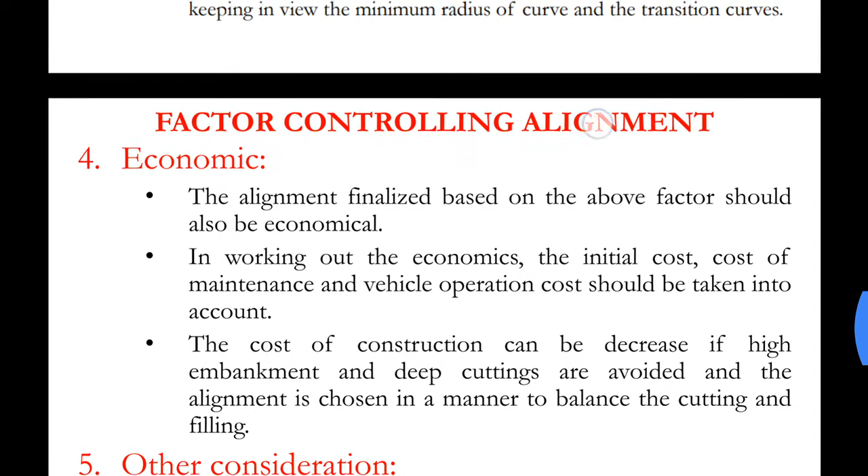In my previous lecture, we had discussed the factors controlling alignment. Now let us go to the next topic: engineering surveys for highway locations. So, what are the engineering surveys that are conducted before or for locating the highway locations? Before a highway alignment is finalized in a highway project, the engineering surveys are to be carried out.

The surveys may be completed in 4 stages. The first 3 stages consider all possible alternate alignments, keeping in view the various requirements of highway alignment. The fourth stage is meant for the detailed survey of the selected alignment.

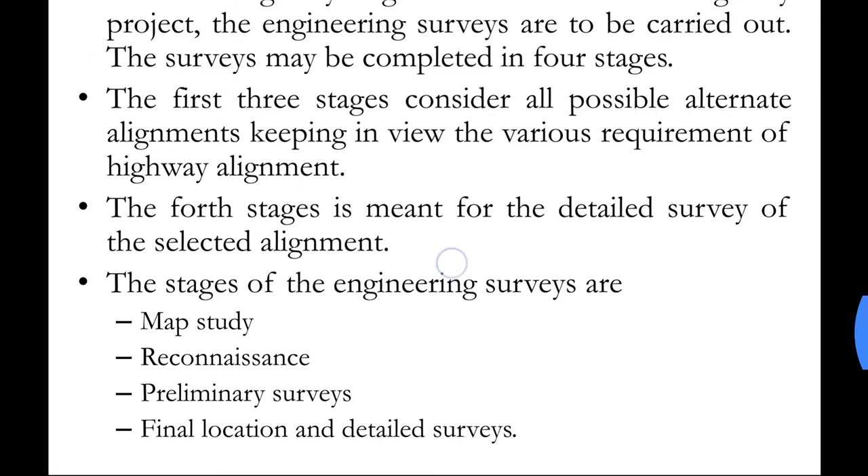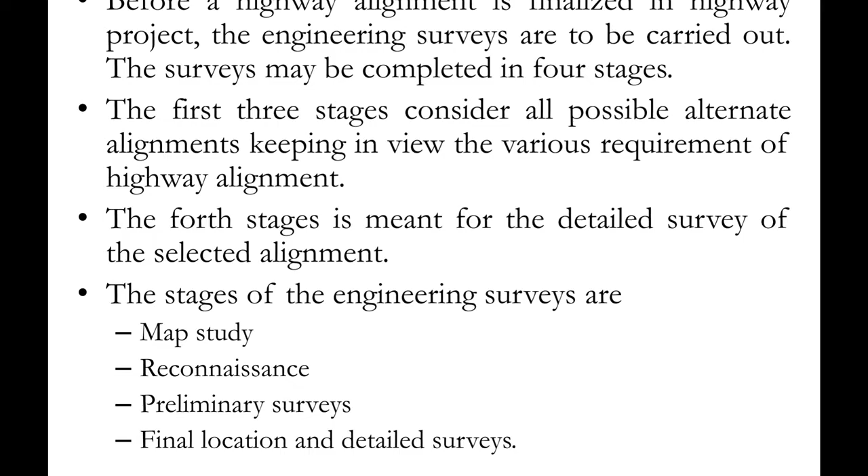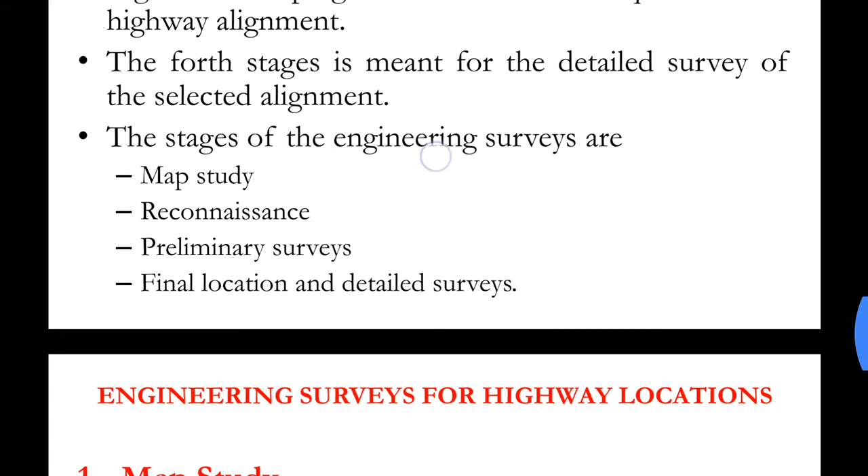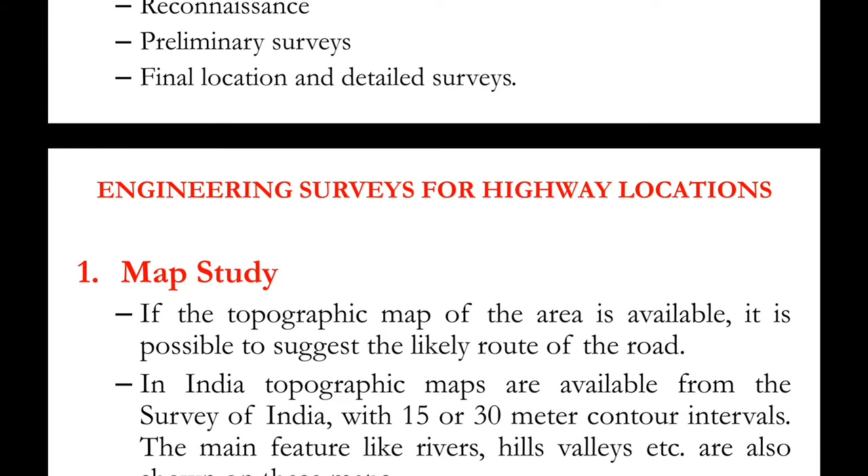So in the first 3 stages of our engineering surveys, we consider different alignment alternatives. At the end of the third stage, we fix a single alignment which would be the best one, and in the fourth stage we consider that alignment and do the detailed survey. So, the stages of the engineering surveys are as follows: first, map study, then reconnaissance, preliminary surveys, and final location and detailed surveys. There are four stages to be conducted.

The first stage is map study. If the topographic map of the area is available, it is possible to suggest the likely route of the road. If we have those topographic maps of that particular area available with us, then we can initially generate a few alternative routes. We can try to avoid the obstructions, and based on that we can generate various alternatives, trying to keep the shortest alignment.

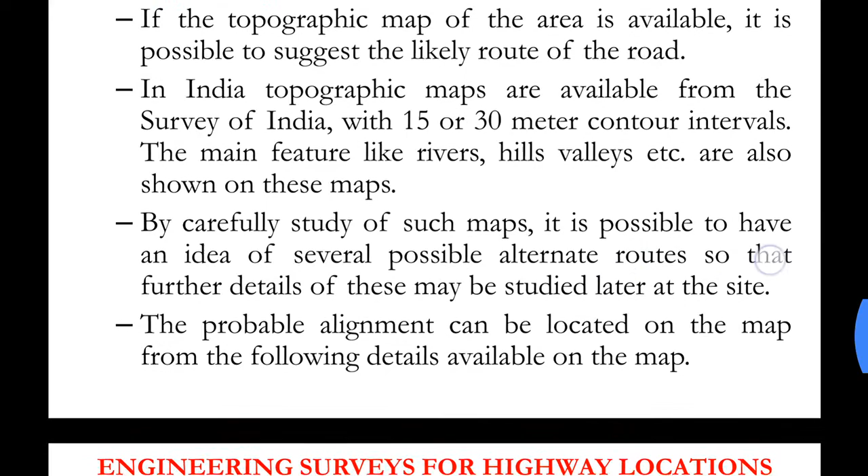In India, topographic maps are available from the Survey of India department with 15 or 30 meters of contour intervals. The main features like rivers, hills, valleys, etc. are also shown on these maps, and these will help us to align the roads. By careful study of such maps, it is possible to have an idea of several possible alternate routes, so that the further details of these may be studied later at the site.

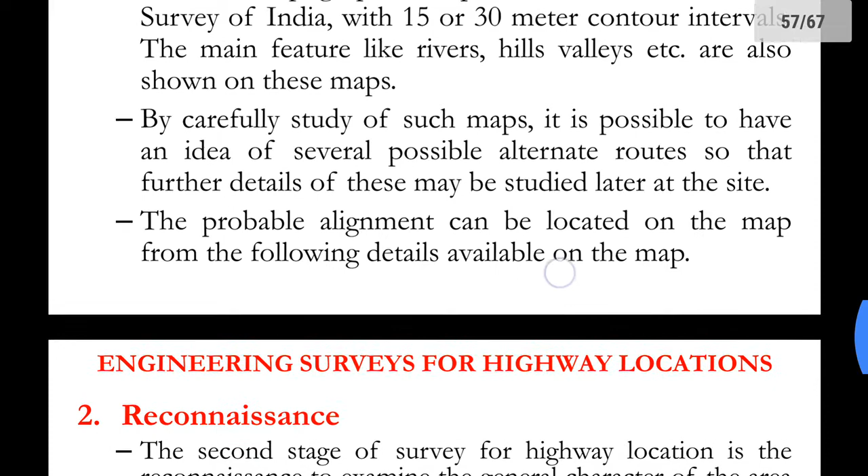The probable alignment can be located on the map from the following details available on the map. So from the details which are available on the map, we can generate various alternatives of our alignment.

The second stage is reconnaissance. The second stage of survey for highway location is the reconnaissance, to examine the general character of the area for deciding the most feasible routes for detailed survey.

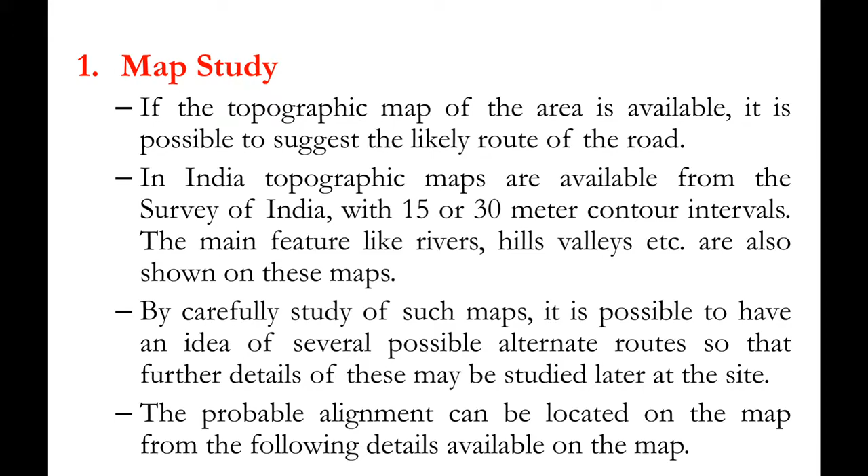In the reconnaissance survey, what we do is we actually go on the field. Up till now, during the map study, we didn't go to that area, but rather we just had a look at the map, and based on the map we tried to generate a few alternatives. Now what we do is we go on the field.

A field survey party may inspect the stretch of land along the proposed alternative routes of the map in the field. Very simple instruments like Abney level, tangent clinometers, barometer, etc. are used to collect additional details.

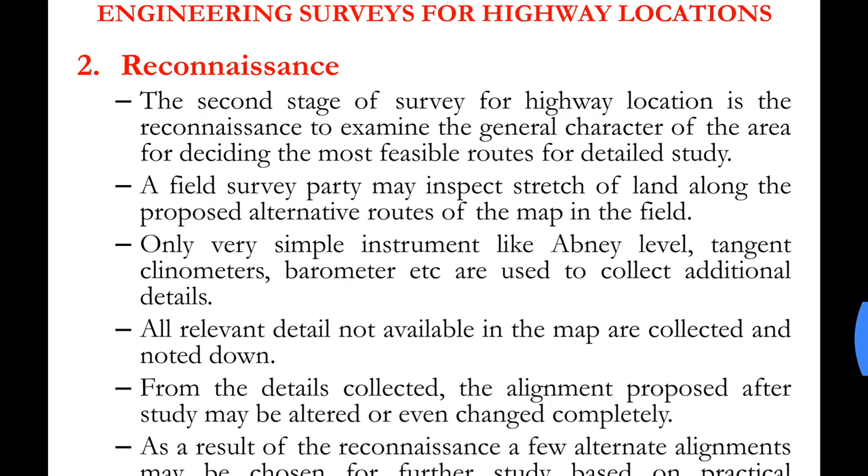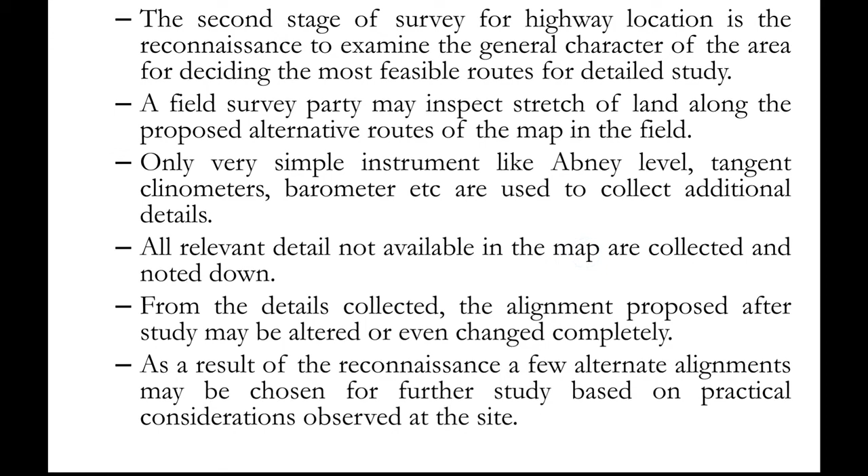All relevant details not available in the map are now collected and noted down. There may be a few details which are not shown in the map, so these details we will collect during the reconnaissance stage.

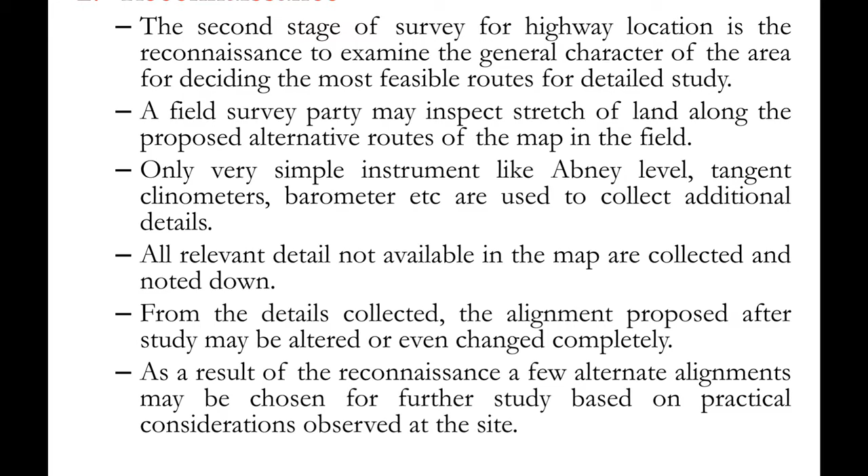From the details collected, the alignment proposed after study may be altered or even changed completely. Now based on these details, we can again alter the alternative alignments that we had set up in the first stage. As a result of the reconnaissance, a few alternate alignments may be chosen for further study based on practical considerations which are observed at site.

So now comes the third stage, which is the preliminary survey. The main objectives of the preliminary survey are to survey the various alternate alignments proposed after the reconnaissance and to collect all necessary physical information.

So we need to survey details with respect to all the different alternate alignments that we had considered, to compare the different proposals in view of the requirements of a good alignment, to estimate quantity of earthwork materials and other construction aspects, to work out the cost of alternate proposals, and to finalize the best alignment from all these considerations.

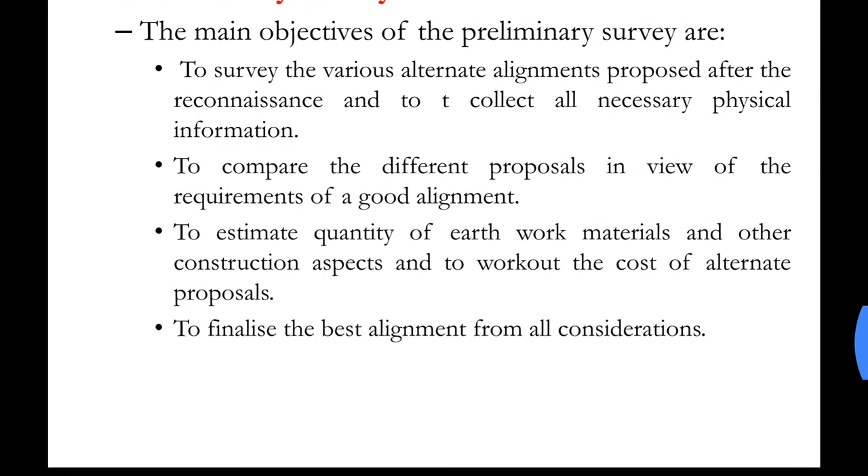So these are the steps we need to do in the preliminary survey. We need to consider all the different alignments, consider different proposals for each of these alignments, and try to find out the cost of each alignment, and whichever would be the best or most economical, we will consider that alignment.

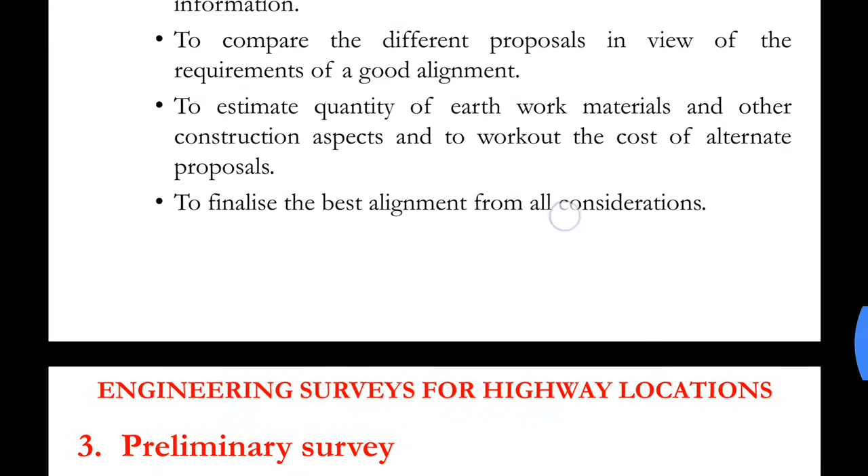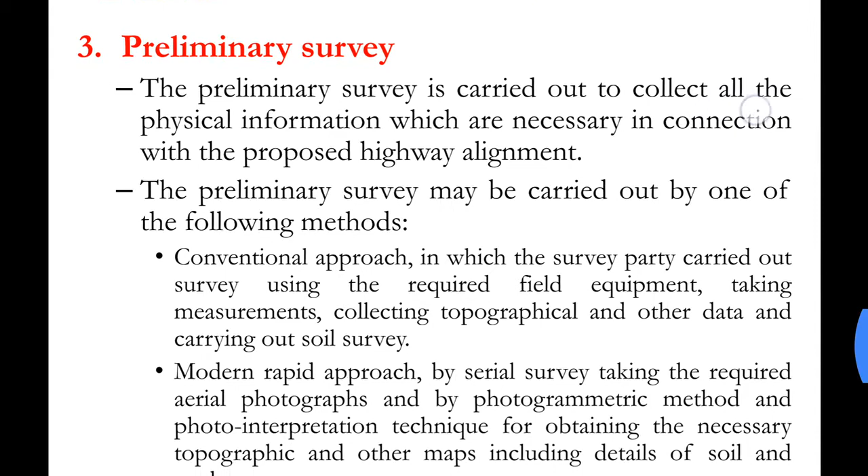Okay, so what actually happens in preliminary survey? The preliminary survey is carried out to collect all the physical information necessary in connection with the proposed highway alignment. The preliminary survey may be carried out by one of the following methods: either a conventional approach or a modern rapid approach.

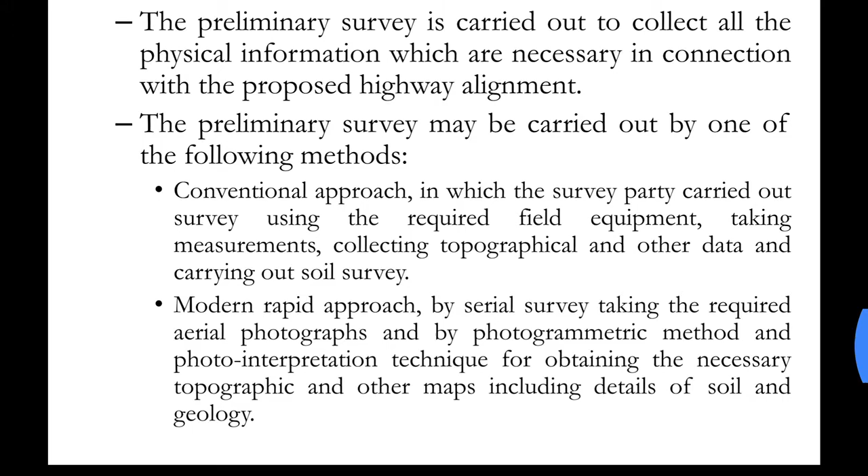In the conventional approach, the survey party carries out survey using the required field equipment, taking measurements, collecting topographical and other data, and carrying out soil survey. So if we actually go on the field and conduct surveys, that would be the conventional approach. What is the modern or rapid approach?

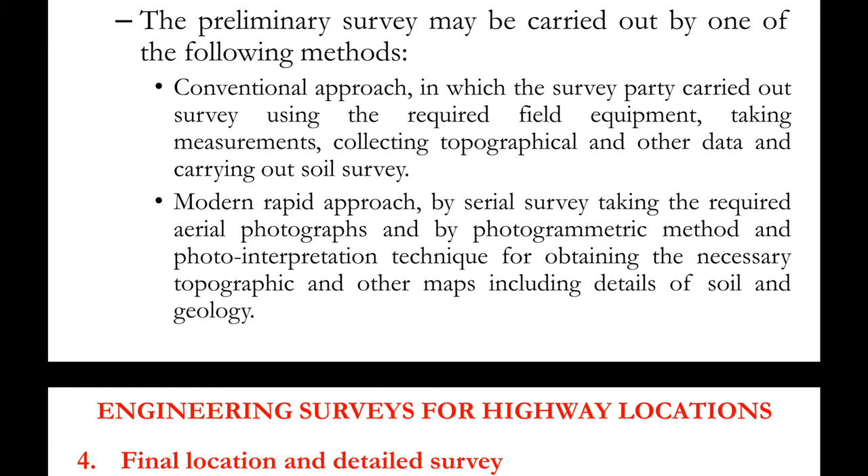By aerial survey, taking the required aerial photographs, and by photogrammetric method and photo interpretation technique for obtaining the necessary topographic and other maps, including details of soil and geology. So if we use aerial photographic techniques, photogrammetric method, or photo interpretation techniques, this would be the modern approach. In this case, an actual survey party may not be required to go on the field.

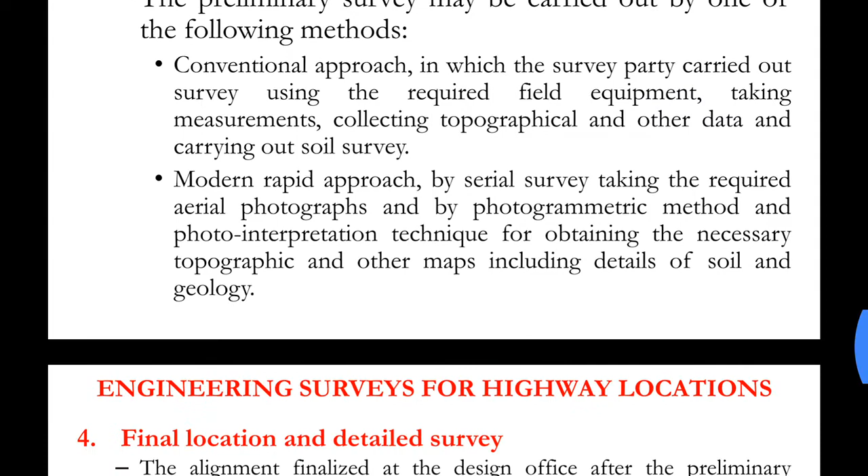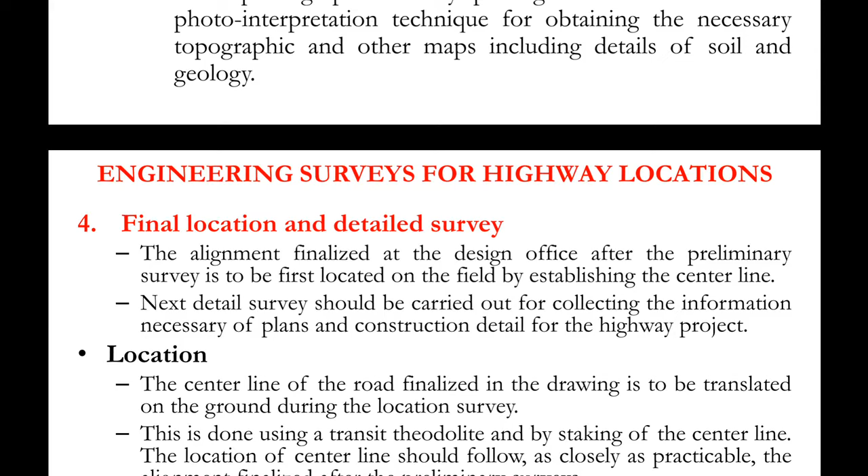So after the preliminary survey stage, a final alignment is already decided. Now what we need to do is a detailed survey on that particular alignment. So the fourth stage is the final location and detailed survey. The alignment finalized at the design office after the preliminary survey is first located on the field by establishing the center line. So the alignment is transferred to the field, and a center line is drawn.

Next, detailed survey should be carried out for collecting the information necessary for plans and construction details of the highway project. Detailed survey may be conducted to find out all the details required for construction of the highway.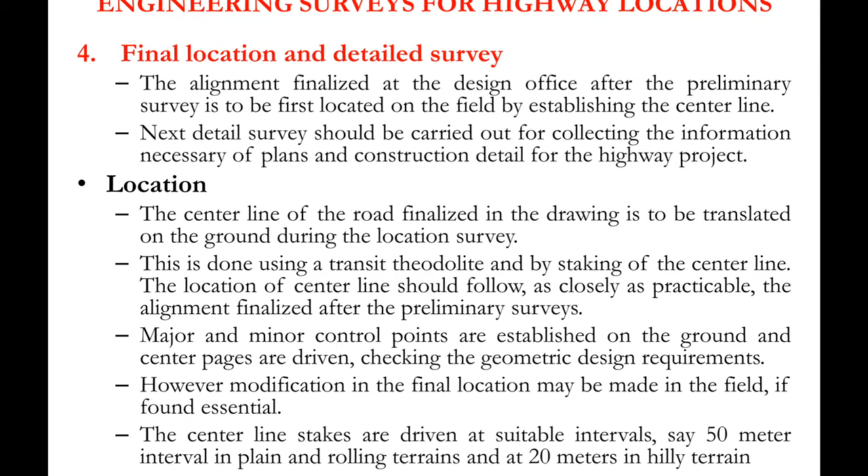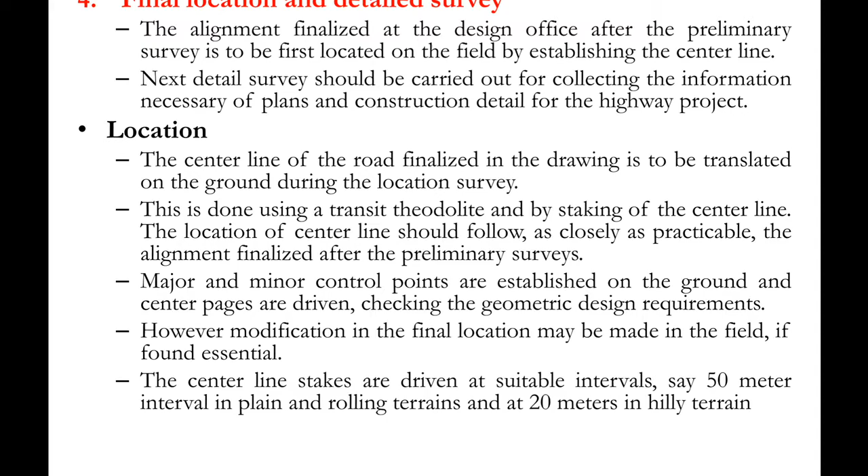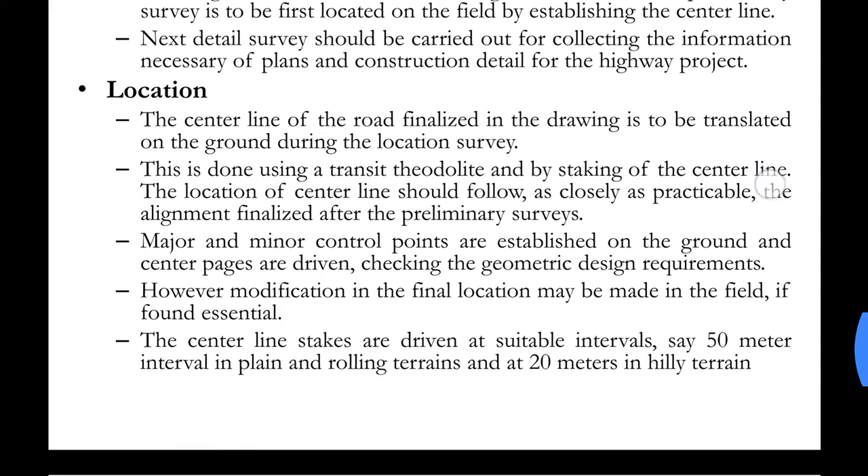In this, first is location. The center line of the road finalized in the drawing is to be translated on the ground during the location survey. This is done using a transit theodolite and by staking of the center line. Using a transit theodolite, we stake out the center line of the highway.

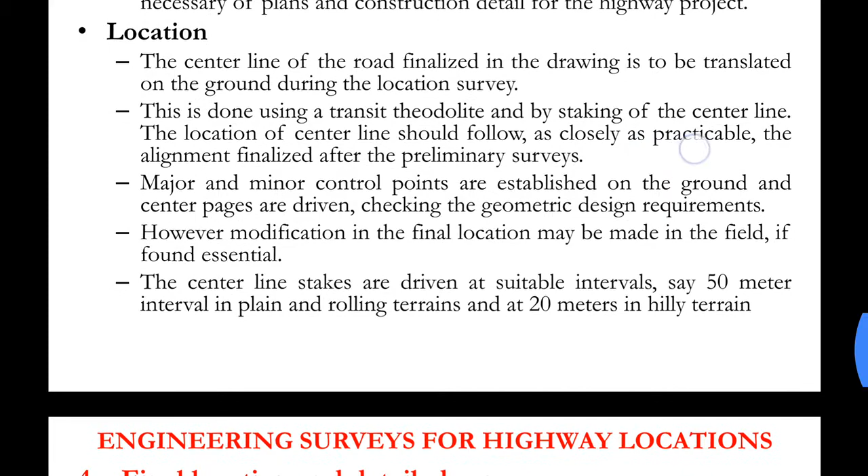The location of the center line should follow as closely as practicable the alignment finalized after the preliminary surveys. Major and minor control points are established on the ground and the center pegs are driven, checking the geometric design requirements. These major and minor control points may be at any change in direction or change in gradient.

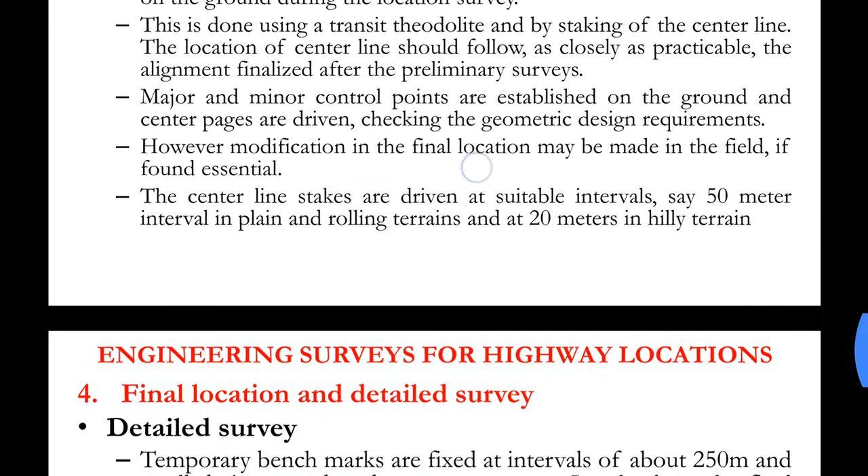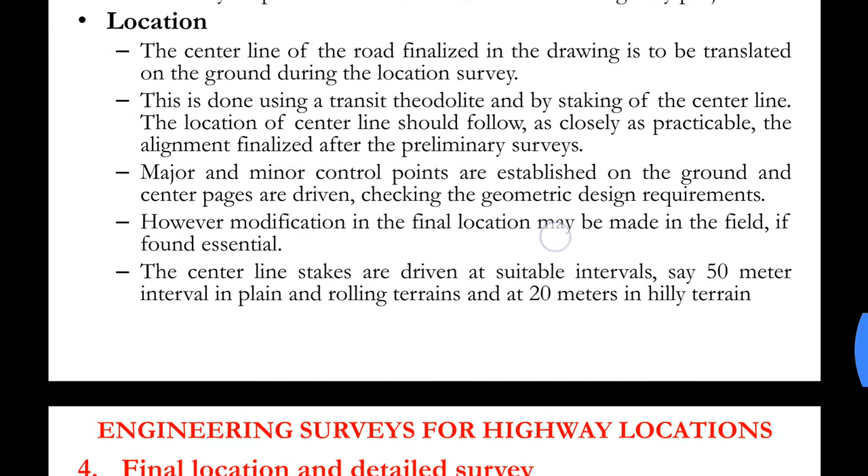However, modification in the final location may be made in the field if found essential. The center line stakes are driven at suitable intervals, say 50-meter intervals in plain and rolling terrains, and at 20 meters in hilly terrain. Now what are plain, rolling, and hilly terrains? This we'll discuss in module 2.

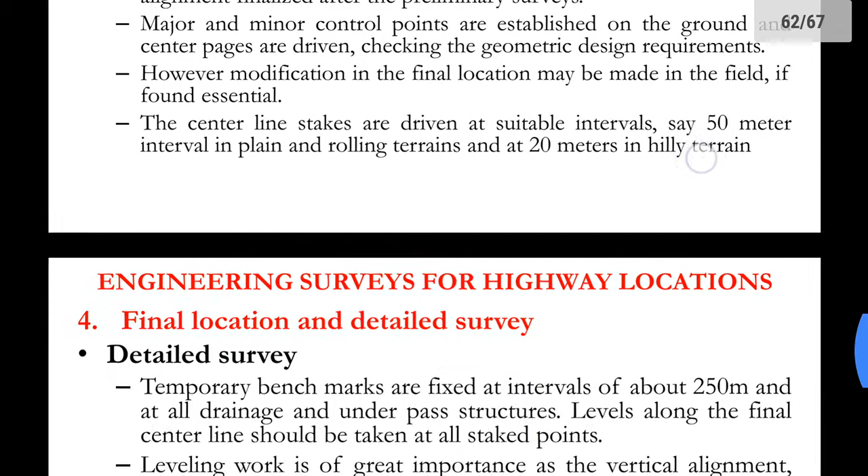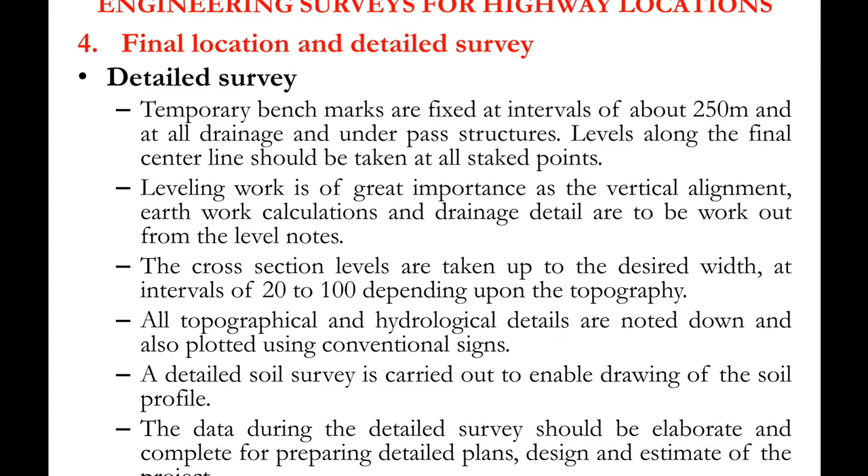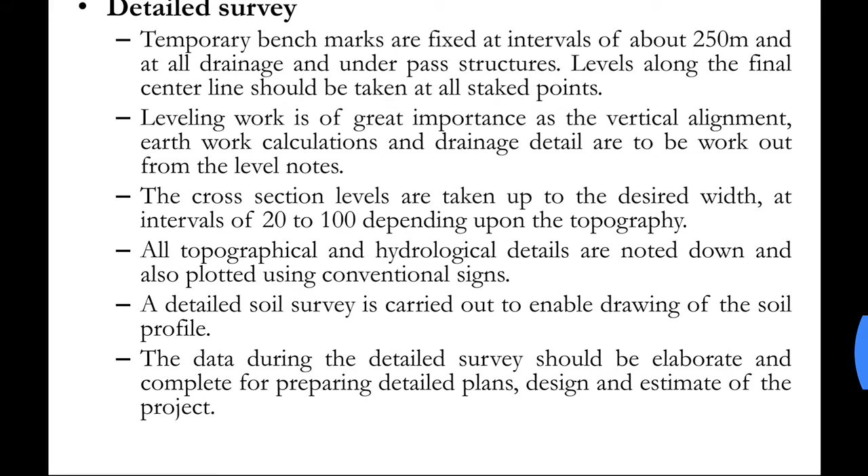Next is detailed survey. Temporary benchmarks are fixed at intervals of about 250 meters and at all drainage and underpass structures. Levels along the final center line should be taken at all staked points. We need to take the levels along the center line.

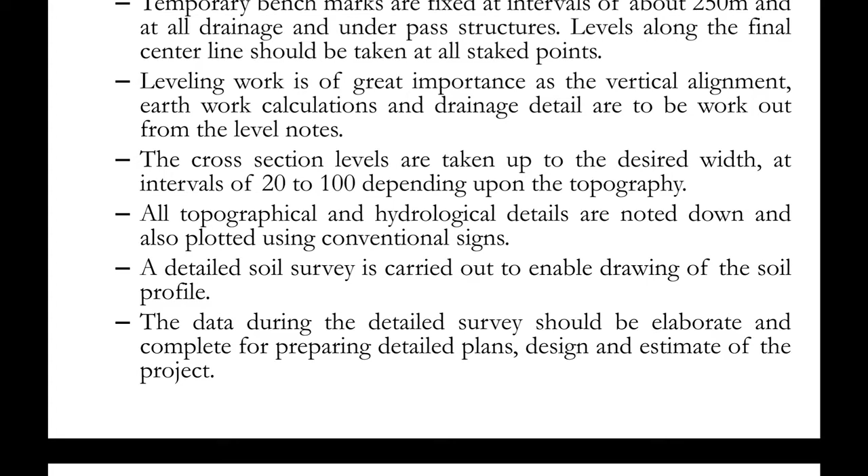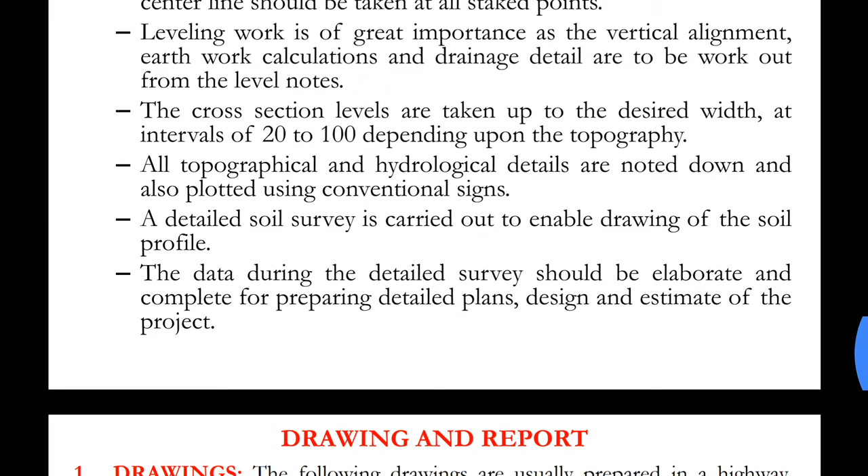Leveling work is of great importance as the vertical alignment, earthwork calculations, and drainage details are to be worked out from the level notes. The cross-section levels are taken up to the desired width at intervals of 20 to 100 meters depending upon the topography.

If the topography is plain or rolling, meaning there is less slope, then we can have higher interval values, taking readings at 100-meter intervals. But if the topography is changing or the slope is high, then we need to keep the intervals smaller.

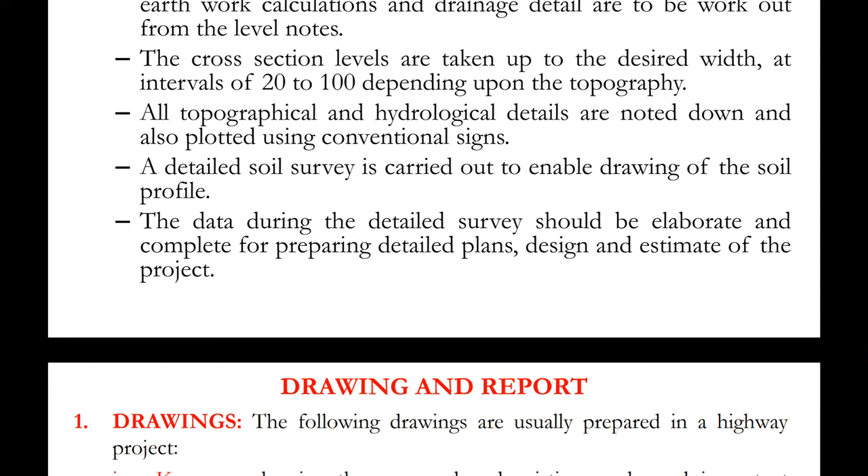All topographical and hydrological details are noted down and are also plotted using conventional signs. The detailed soil survey is carried out to enable drawing of the soil profile. So a detailed soil survey is conducted and we need to draw the soil profile.

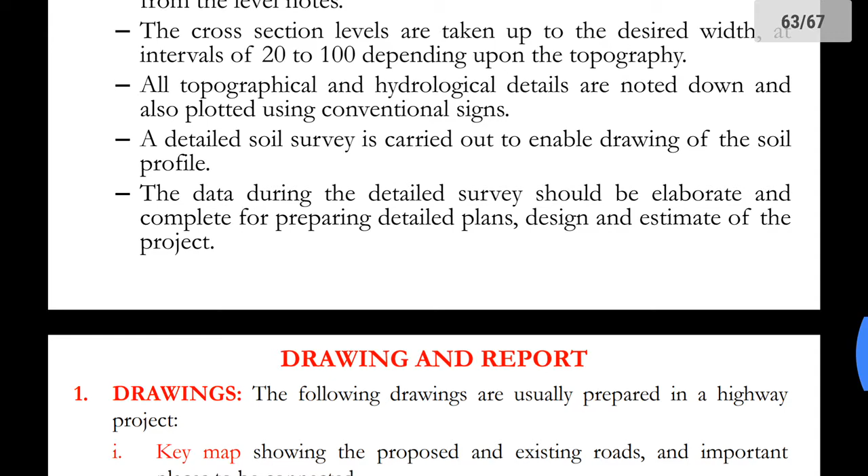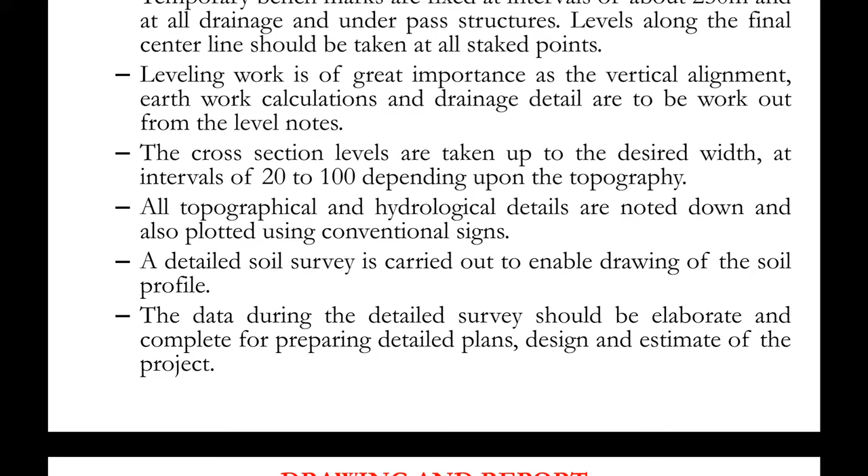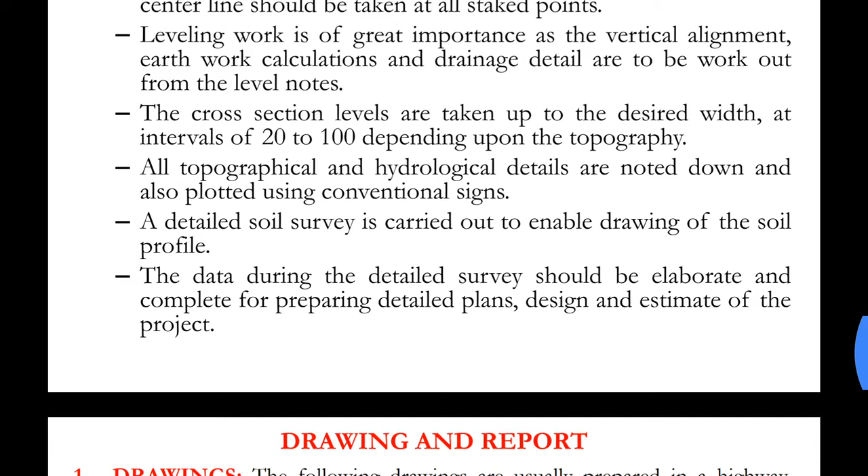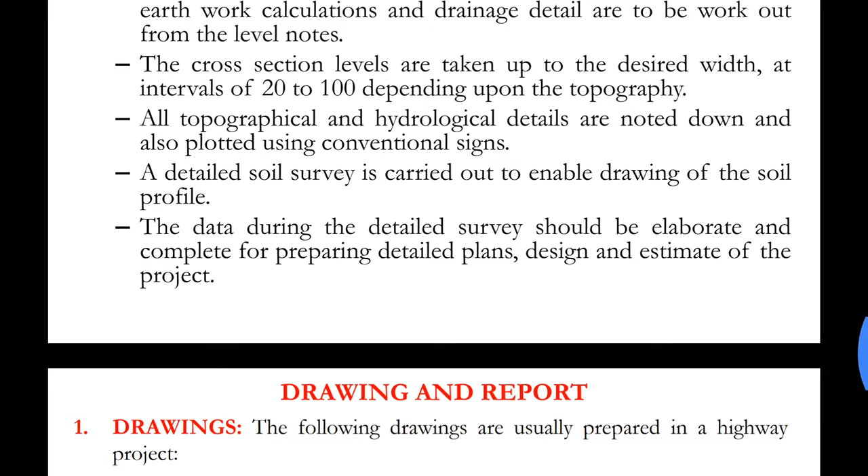The soil profile will give us details regarding the existing soil and the depth of the soil layers present in that area. The data during the detailed survey should be elaborate and complete for preparing detailed plans, design and estimate of the project.

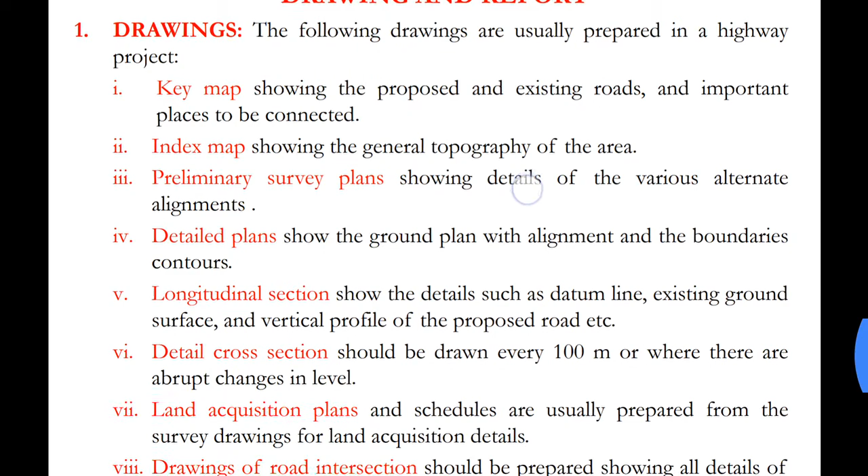The next topic is drawing and report. We need to prepare a few drawings before we go for actual construction. These include key map, index map, preliminary survey plans, detailed plans, longitudinal section, detailed cross-section, land acquisition plans, drawing of road intersection and land plans.

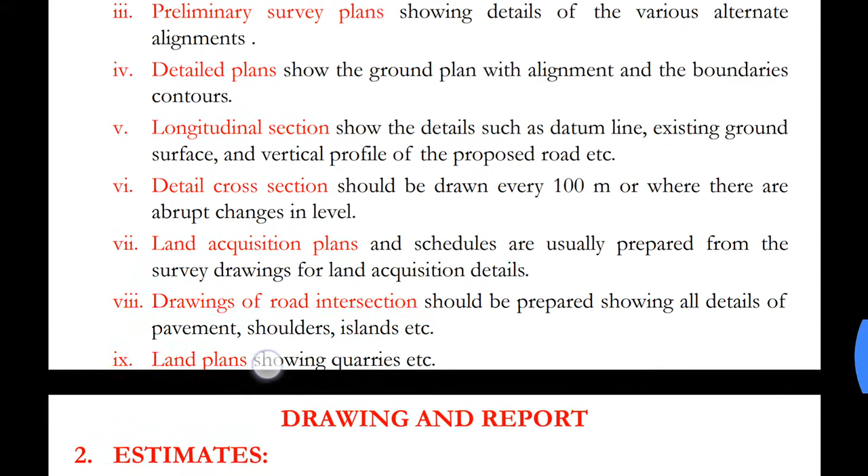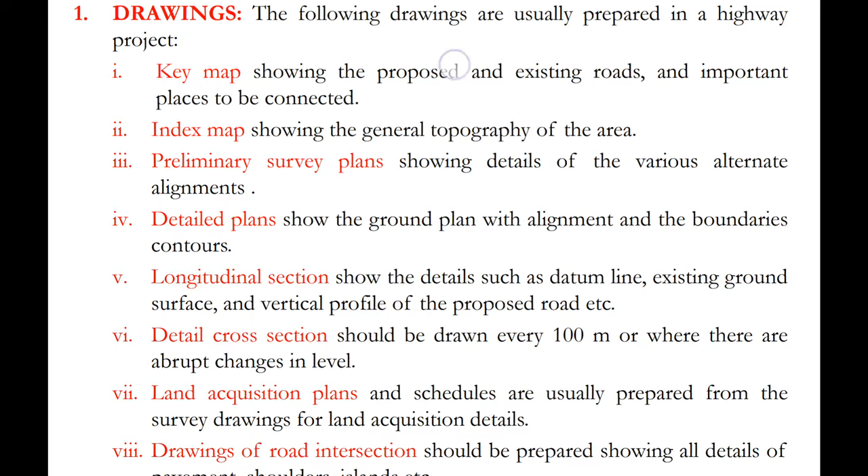What does the key map include? Showing the proposed and existing roads and important places to be connected. All these details are included in the key map.

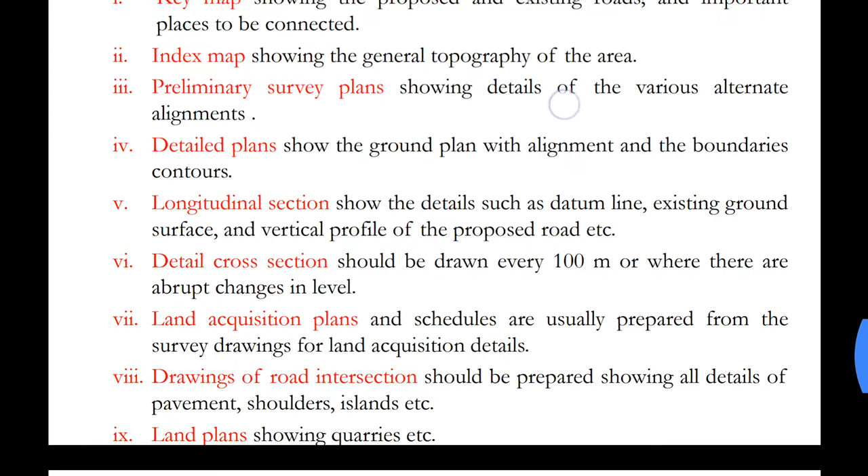The index map shows the general topography of the area. The preliminary survey plan shows details of the various alternate alignments. Detailed plans show the ground plan with alignment and the boundary contours.

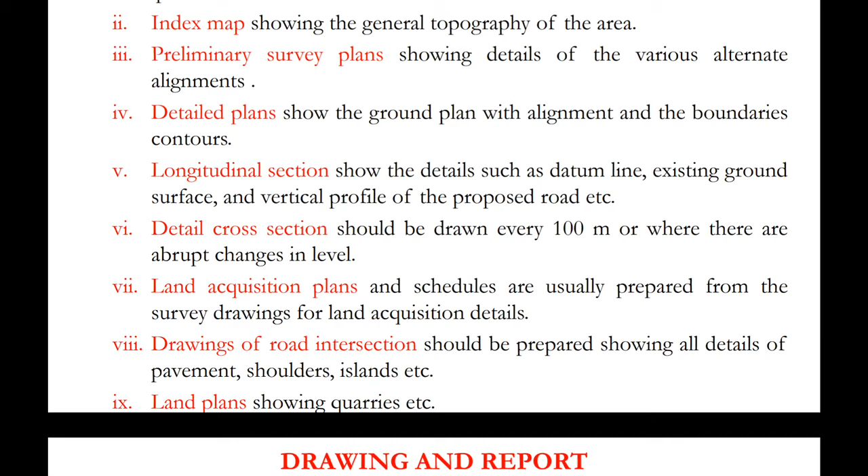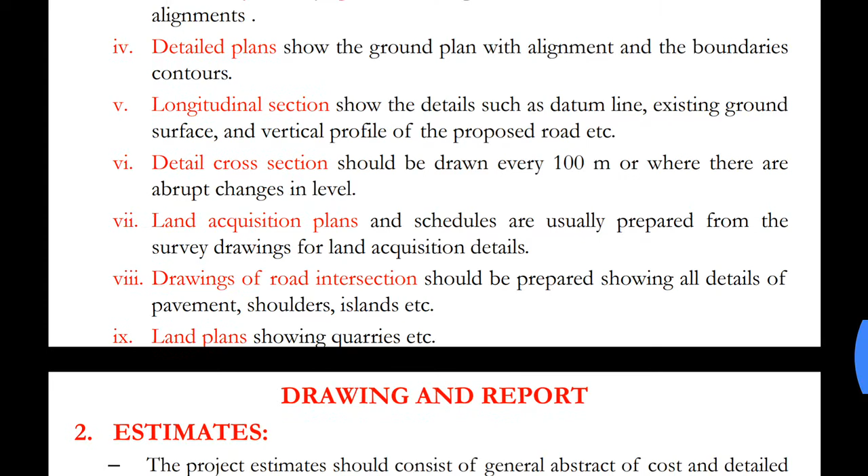Longitudinal sections show details such as datum line, existing ground surface and vertical profile of the proposed road. Detailed cross sections should be drawn every 100 meters, or where there are abrupt changes in level. If there are no changes in level, it can be drawn at an interval of 100 meters.

Land acquisition plans and schedules are usually prepared from the survey drawings for land acquisition details. Initially we need to acquire that land, so for that we need to prepare land acquisition plans.

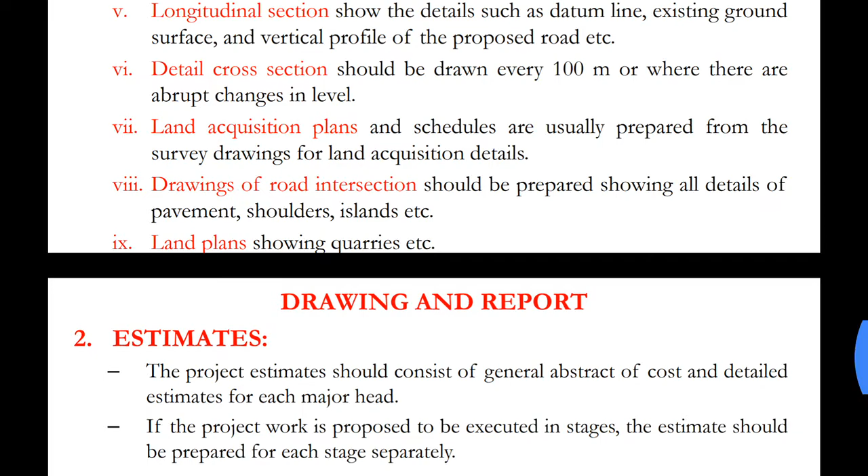Drawings of road intersection should be prepared showing all details of the pavement, shoulder and islands. What is pavement, shoulder and islands, we'll learn in the next module.

Land plans include showing quarries, etc. Quarries are areas from where we extract either soil or aggregates.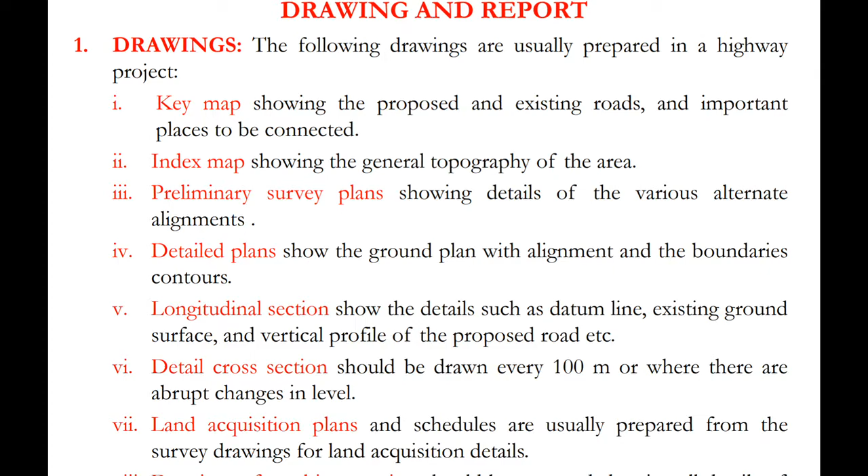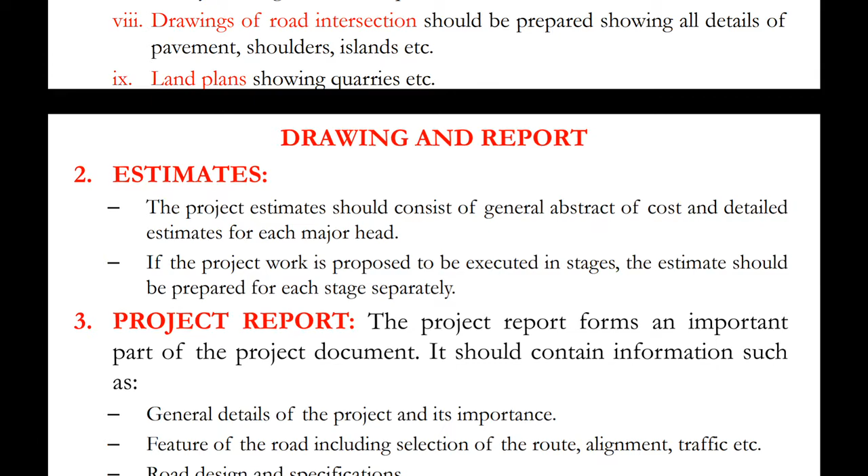Next topic is estimates. We need to make estimates for our project. The project estimates should consist of general abstract of cost and detailed estimates for each major head. If the project work is proposed to be executed in stages, the estimate should be prepared for each stage separately. So basically estimate is finding out the cost value of the project, and if our project is in stages, then for each stage we need to prepare a different estimate.

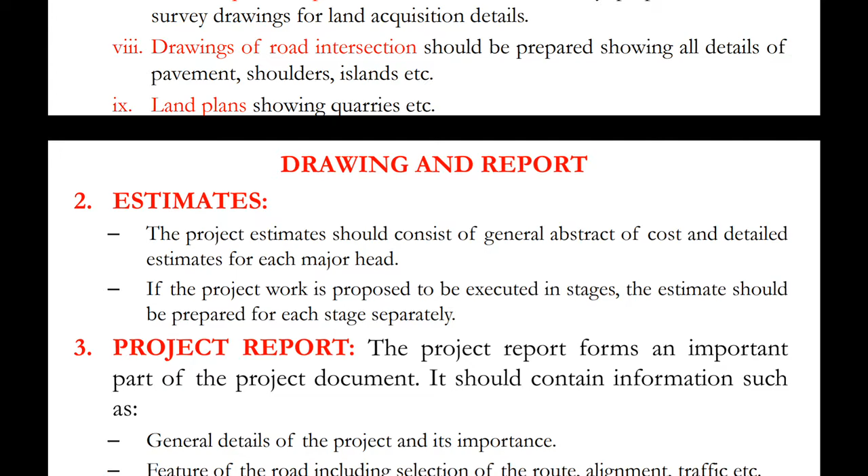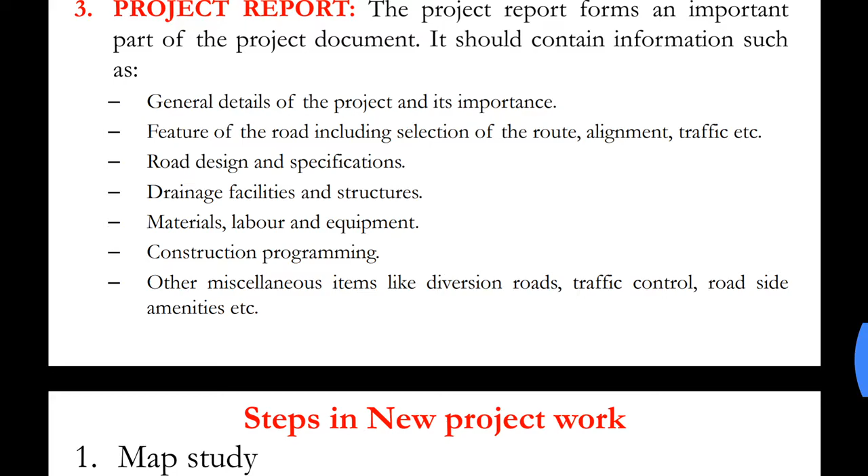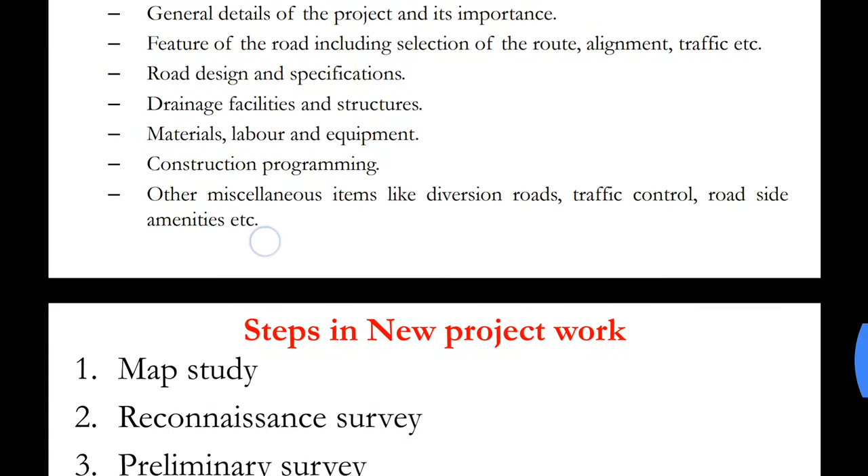After drawing the plans and making the estimates, we need to prepare a project report. The project report forms an important part of the project document. It should contain general details of the project and its importance, features of the road including selection of route, alignment and traffic, road design and specifications, drainage facilities and structures, materials, labor and equipment, construction programming, and other miscellaneous items like diversion roads, traffic control, and roadside amenities. Including all these factors, we can prepare a project report.

Now, what are the steps for a new project work with respect to highways? What are the stages? We're just briefing and mentioning the stages here.

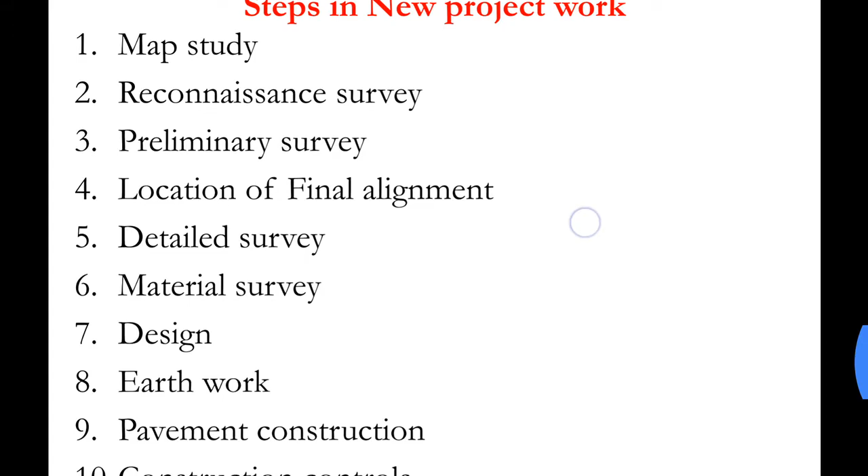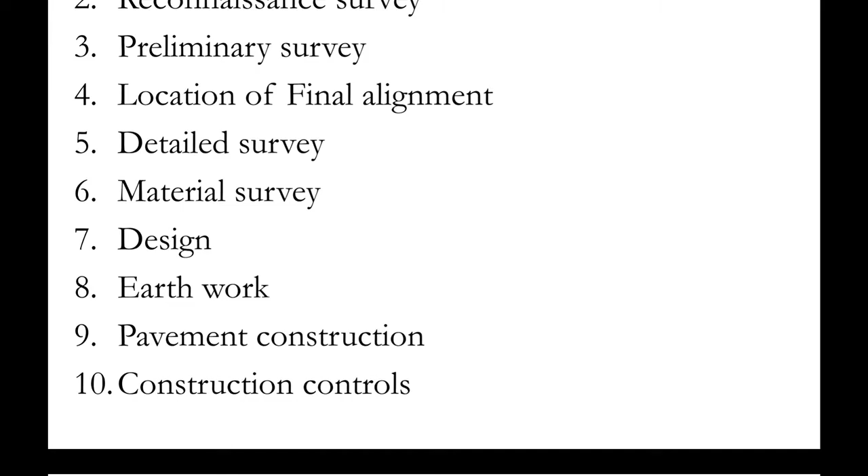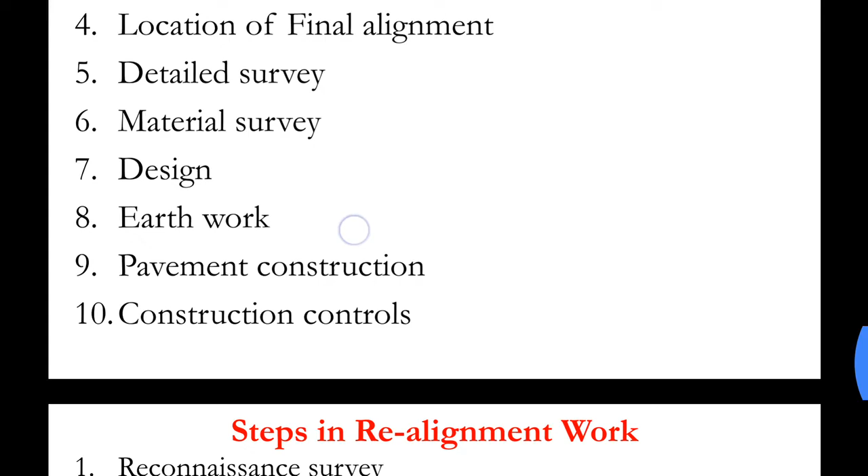The first is map study, followed by reconnaissance survey, preliminary survey, location of final alignment, then detailed survey, material survey. Material survey involves finding out from where we can get various materials like soil, aggregate, cement, labor, and machinery. Then design of the road, earthwork - cutting and filling, pavement construction, and construction controls.

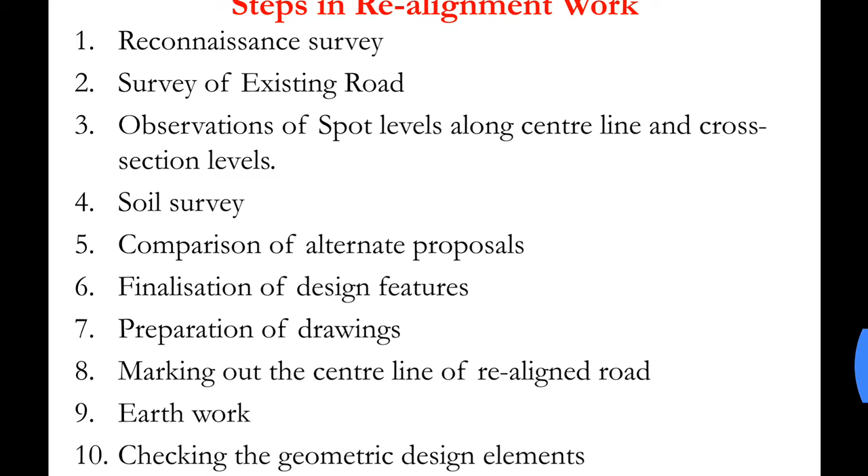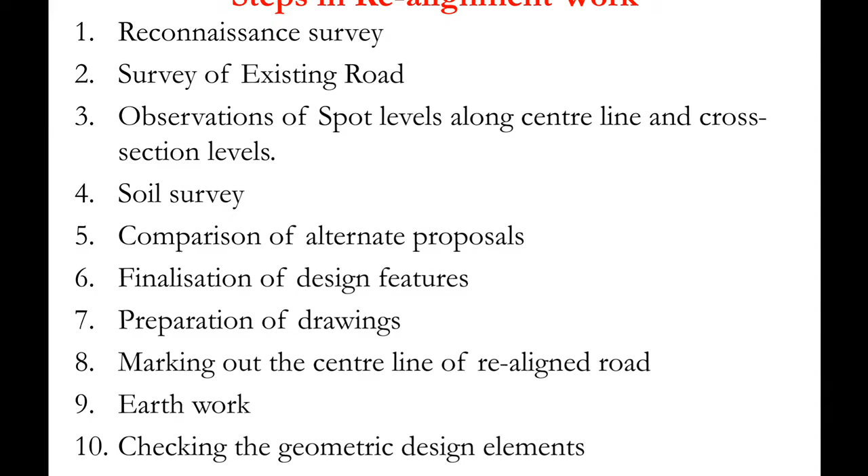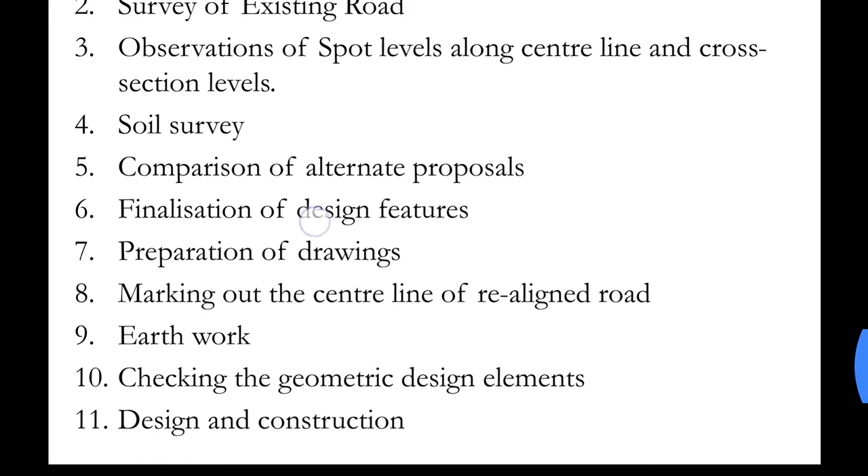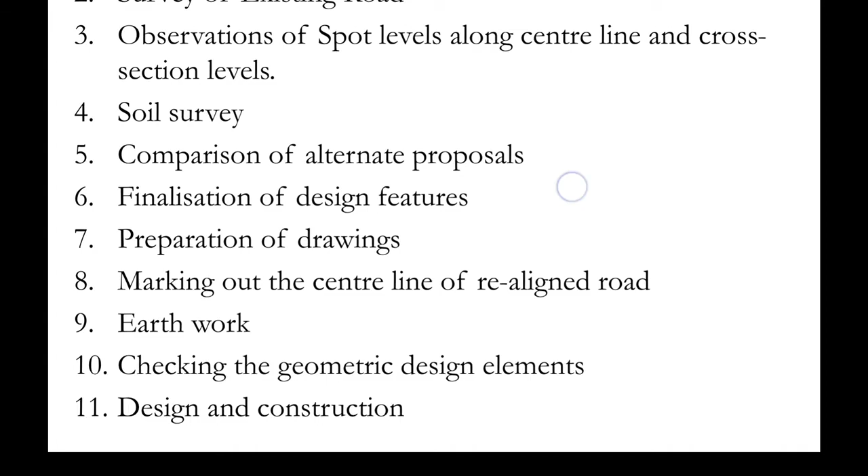Then the steps of realignment work. If a road is already aligned and we need to check it and realign it, what are the stages? Reconnaissance survey, survey of existing road, observations of spot levels along the center line and cross section levels, soil survey, comparison of alternate proposals, finalization of design features, preparation of drawings, marking out the center line of realigned road, earthwork, checking the geometric design elements, and design and construction of the pavement. So these were the steps in case we are doing a realignment work.